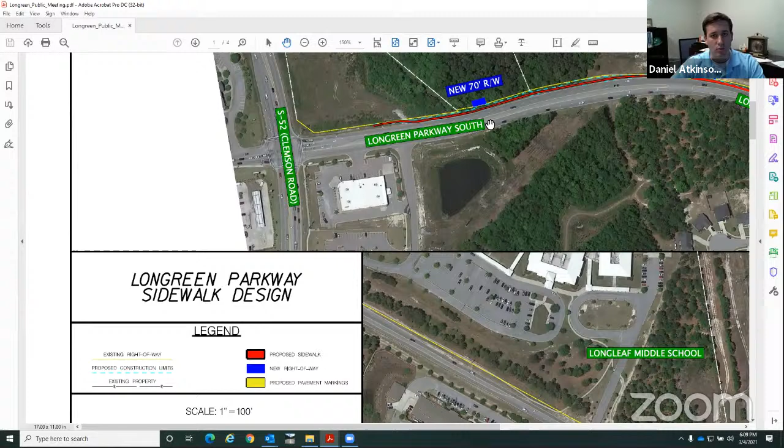The new right-of-way in certain areas would be for slopes that go outside existing right-of-way, riprap which we need to slow down the water to prevent erosion, extension of pipes, maybe silt fence - those are some instances where we'll need new right-of-way. The sidewalk is on the western side, starting here, and extends all the way through Landon Place Drive, where it connects to the existing sidewalk at Longleaf Middle School.

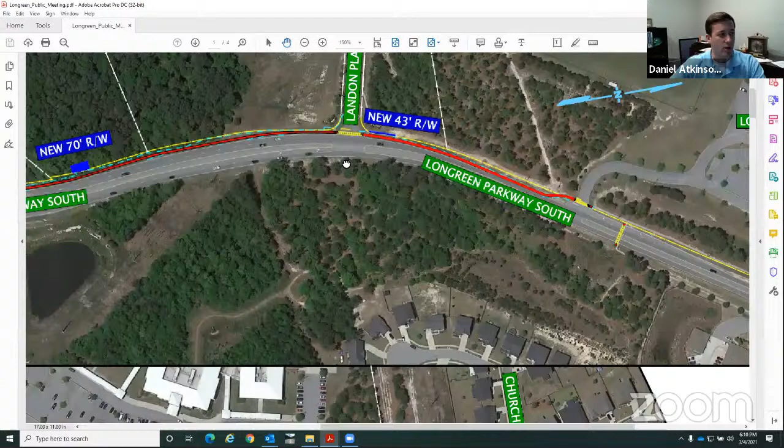One other point - since Stephen mentioned this was a request from the schools, we are going to propose putting back ladder style crosswalks. Ladder style are what you put where schools are located, and they're safer for pedestrians and school children. There'll be high visibility - you can see them very well at night as well. They kind of sparkle a little bit at night if you shine your lights on it the right way.

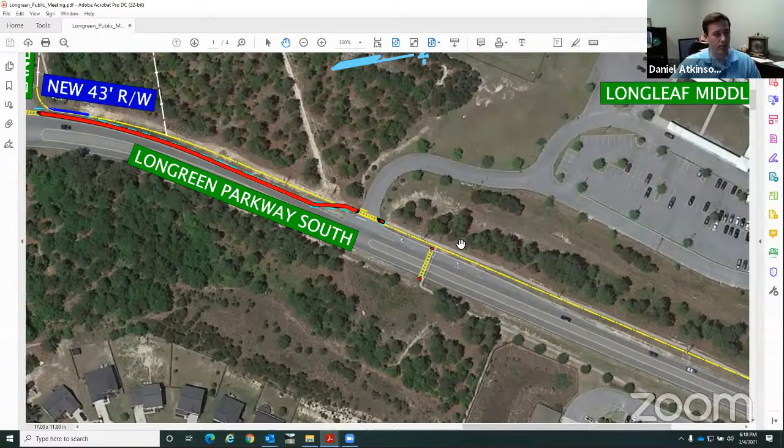We tie into the sidewalk located here at the middle school. We are also going to rebuild the existing curb ramps at this crossing, which doesn't have truncated domes or ADA curb ramps. So we're proposing to replace that as well, and put new pavement markings down there to make that stand out a little more.

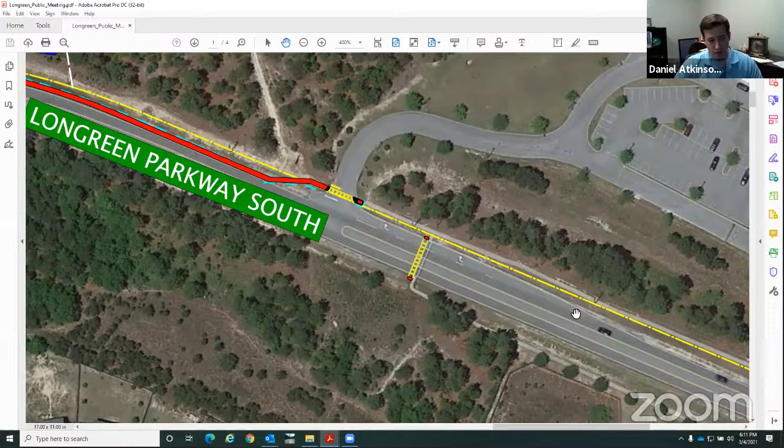Also, part of this project, we are adding a layer of asphalt to the right turn lane into the school only. In this area, we will not be resurfacing Longreen Parkway - we'll just be adding a lift of asphalt at this location. Anybody who uses that school right now knows there's a little drop off, so we're going to mill that a bit, make it smooth, and then add a lift of asphalt in that area.

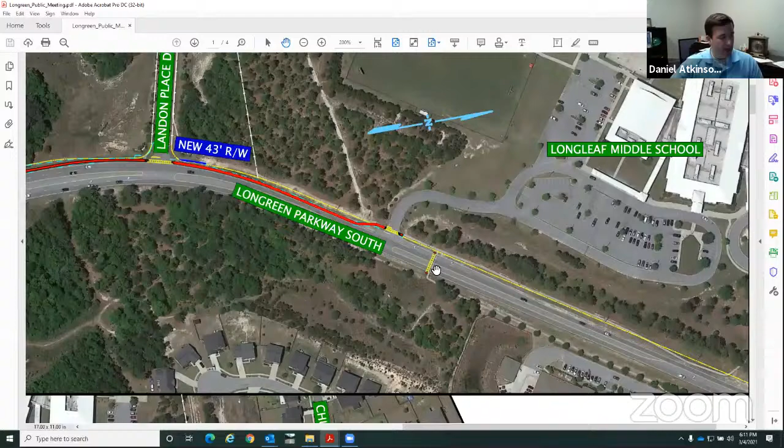So that's kind of the Longreen Parkway South in a nutshell. As I mentioned, it's about 1,600 linear feet. We'll talk about the northern segment.

The northern segment starts on the other side of the school entrance, and as part of that project, we're also going to rebuild the crosswalk in this area and add some curb ramps and some truncated domes. We will also be resurfacing this turn lane, just the right turn lane in. We will be putting the sidewalk on the eastern side of the project, since there is already existing on the western side. But we continue—

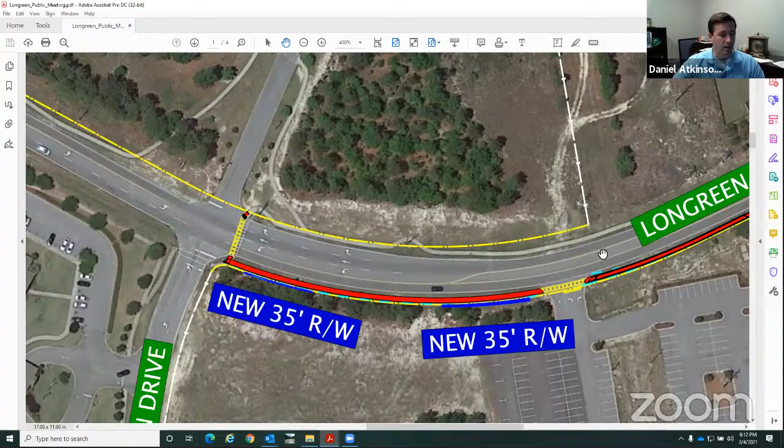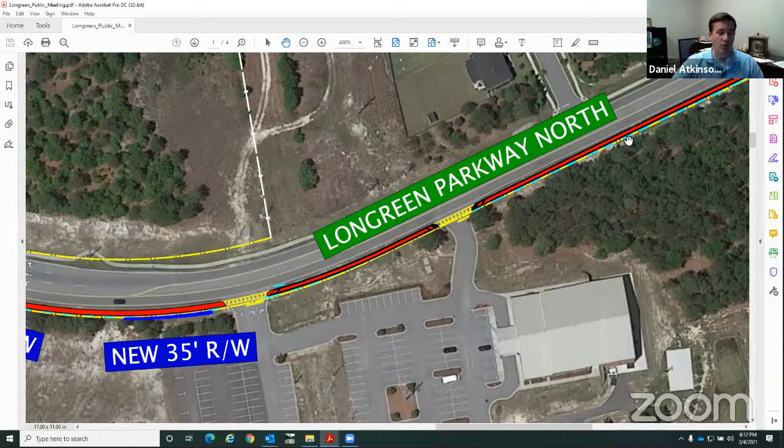The ladder style crosswalk throughout this corridor as well, since it connects to Sandlapper Elementary.

So we will be getting a new right-of-way from this church right here. We have new riprap, which we need to stabilize ditches for new pipes. So we will be acquiring some new right-of-way in this area as well.

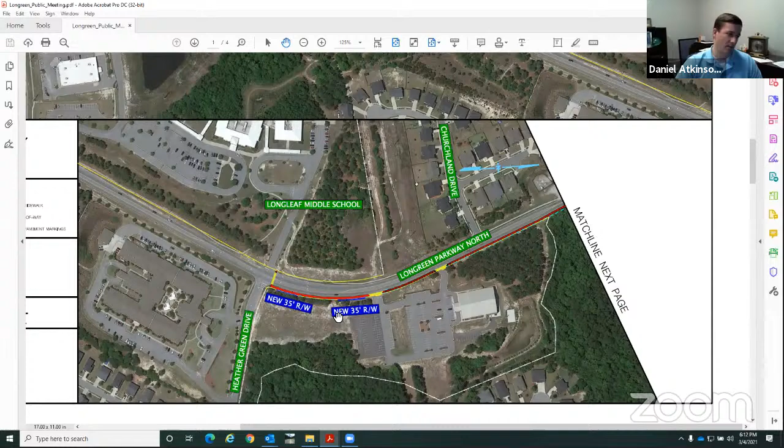I'll move to the next sheet. This is Roberts Branch, and we will be continuing the sidewalk down through that area. We will decrease the sidewalk in this area to 4 feet for about 100 feet.

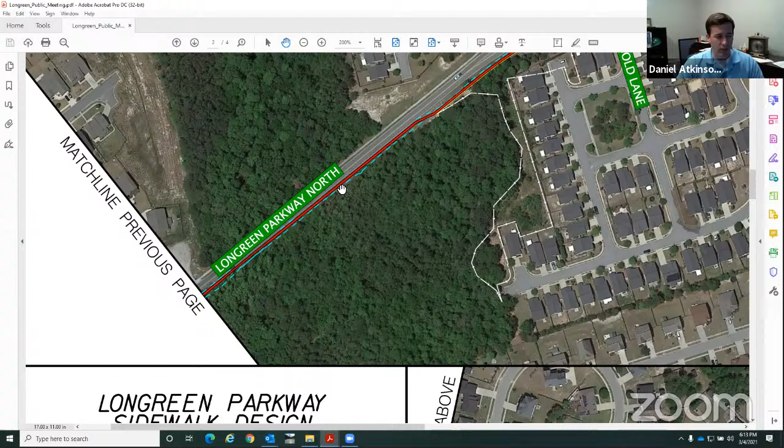This is due to environmental impacts, which would be associated with extending the pipe. So we decided that we did not want to impact the wetlands, impact the streams, impact the FEMA floodplain. So we shrunk the sidewalk to 4 feet in this area for 100 feet only to mitigate for those environmental issues.

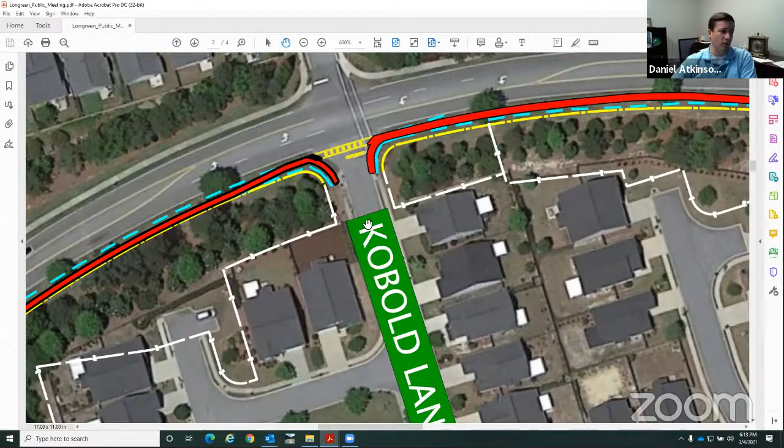Moving to the north, we cross Kobold Lane. We will tie into existing sidewalks on Kobold Lane. We will rebuild the curb ramps at all these locations as well.

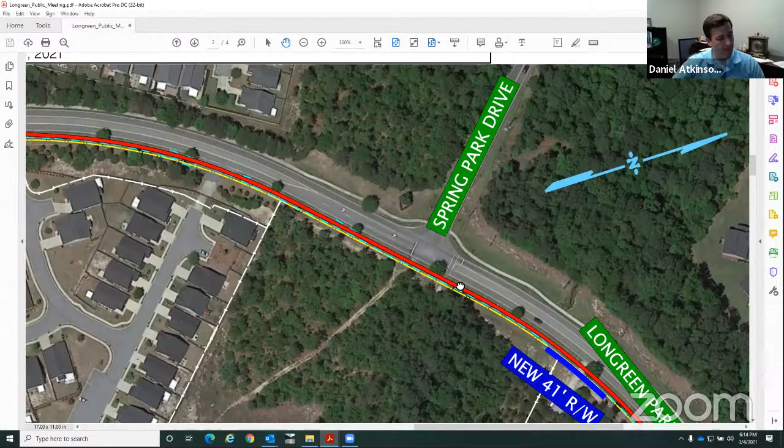And this is Spring Park Drive. We will have a curb ramp as well right in this location, which as part of the Spring Park Drive, since this is a three-way stop, we would propose to connect that sidewalk to this project.

Moving on down. New right-of-way in this area is due to a new ditch and some new riprap, which is required for sediment and erosion control.

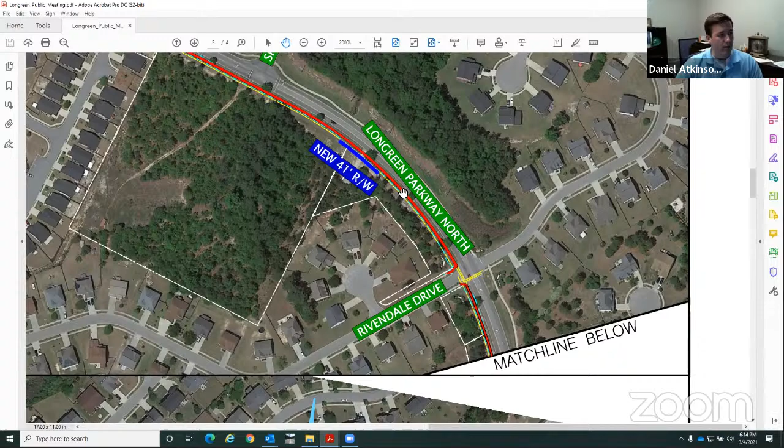At Rivendale, we're rebuilding the curb ramps, adding new crosswalks, new stop bars, and tying into the existing sidewalk in that area as well.

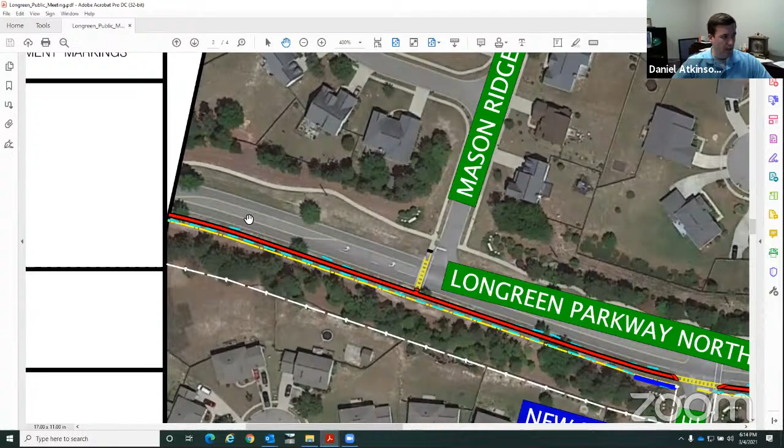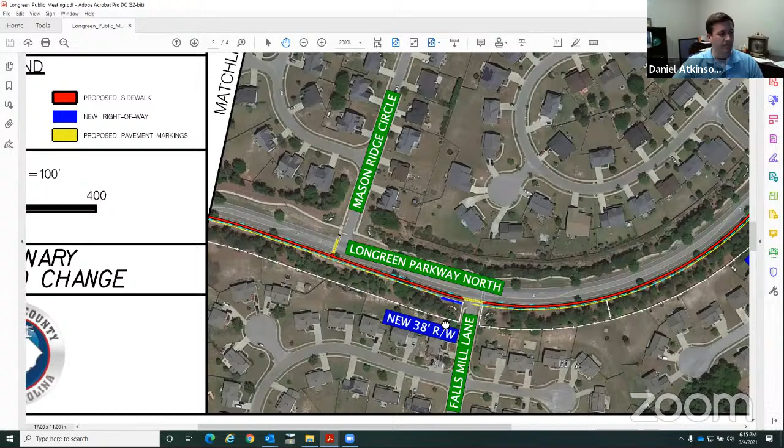And then we will go here, and continuing north, we'll restripe this existing crosswalk at Mason Ridge and Longreen. Some new right-of-way here as well. We are trying to avoid all—

development signs and irrigation. We may have some small impacts, and if there are some impacts, we will coordinate those with the property owners during construction to try to get them relocated or try to design something so we don't impact these areas.

At Falls Mill Lane, we add new curb ramps, new ladder style crosswalk, and a new stop bar.

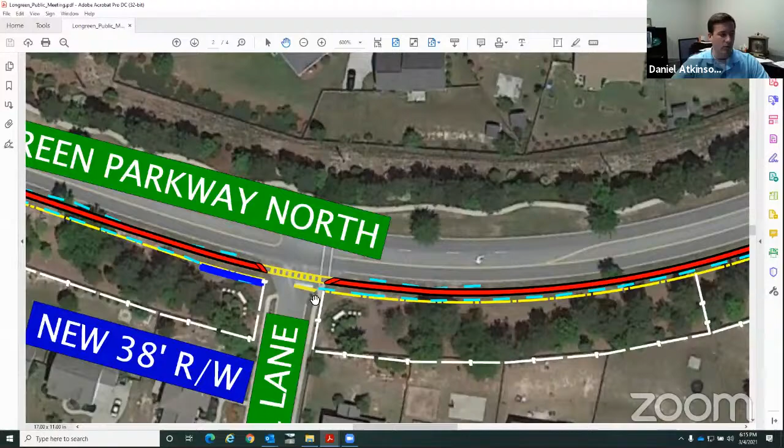We continue north. For this area, we have to acquire new right-of-way because we have to make sure the water flows back towards the south, and we need to steepen up our ditches and also add some erosion control measures like silt fence and turf reinforcement matting to slow the velocities and prevent erosion.

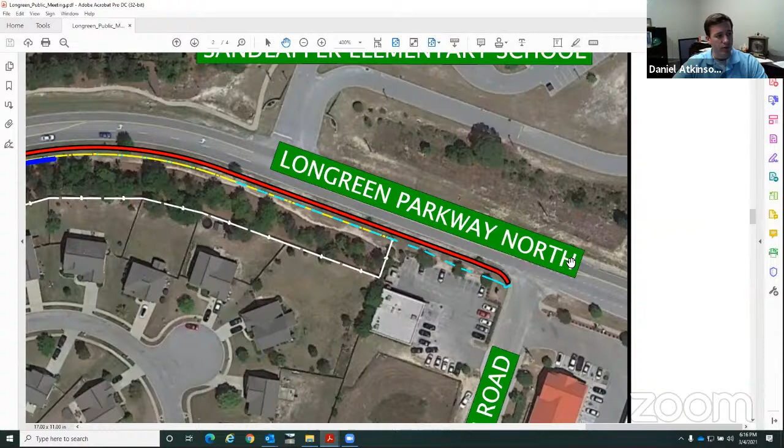We extend north all the way to Longtown Road where our project ends. There is an existing sidewalk we will tie into in this area. And we will also be resurfacing this turn lane into Sandlapper, which you can't see, but it's the same situation which occurred at Longleaf Middle, where there's a drop off. So we'll be adding a lift to surface course as well to that area.

So that's kind of the overview, a more detailed, down in the weeds, plan view of the corridor. We'll show you some sample illustrations of the typical section, which is what it would look like.

So this is Longreen Parkway to the south, from Clemson Road to Longleaf Middle. You have your 3-lane roadway, and you'd have your new sidewalk on the western side of the project.

Moving to the north, Longreen Parkway to the north. This is pretty much the exact same traffic configuration, 3 lanes to the north, except we have the new sidewalk on the eastern side of the corridor.

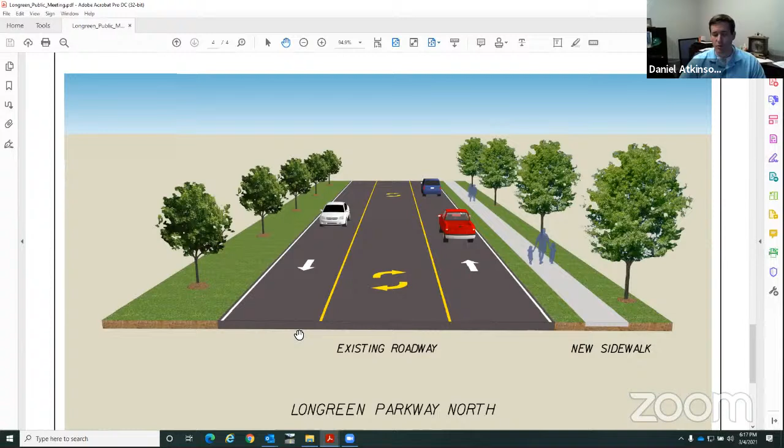Another thing that Stephen mentioned is the school crossing guards. As part of this project, we are adding special signs and flashing lights for the school zones, which the county will operate and maintain in the future. The flashing lights are called TAPCO flashing yellow bulbs, and we'll be installing 4 of those throughout the project corridor, taken care of during construction.

I don't think there's anything else. One other tidbit: this is not an SCDOT maintained road, it's a county maintained road, so we will not have to acquire SCDOT encroachment permits.

And I think that's all I had, Stephen and Mike. Is there anything else you wanted me to address? I don't know about Stephen, but I do have questions here. I can read some of the questions that have come in, and I think you may have covered some of them in the presentation, but I will read them in full.

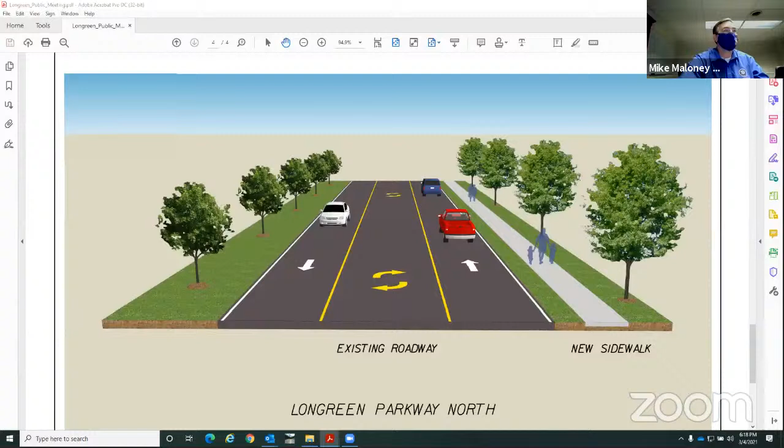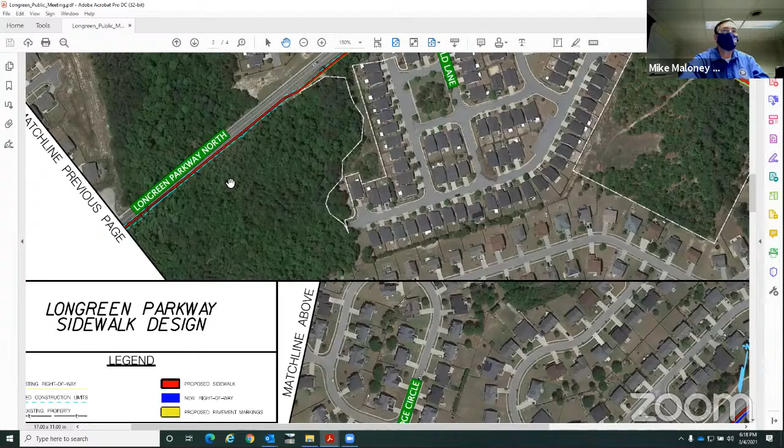ADA guidelines recommend a 5-foot wide sidewalk, and that's what SCDOT does as much as possible on new projects. Although the Parkway is county owned, why not follow current ADA guidelines instead of 4-foot wide? I believe you pointed out that we are putting in 5-foot, but there is a stretch with environmental concerns. Yes, there are actually 2 stretches. There's one at Roberts Branch, where we figured it was better environmentally to reduce the sidewalk down to 4 feet. That would prevent us from lengthening. There's about 8 84-inch or 60-inch crossline pipes there, so reducing the sidewalk prevents lengthening those pipes, which would have negative impacts on wetlands and streams. So we shrunk the sidewalk down to 4 feet in this area to mitigate for those environmental impacts.

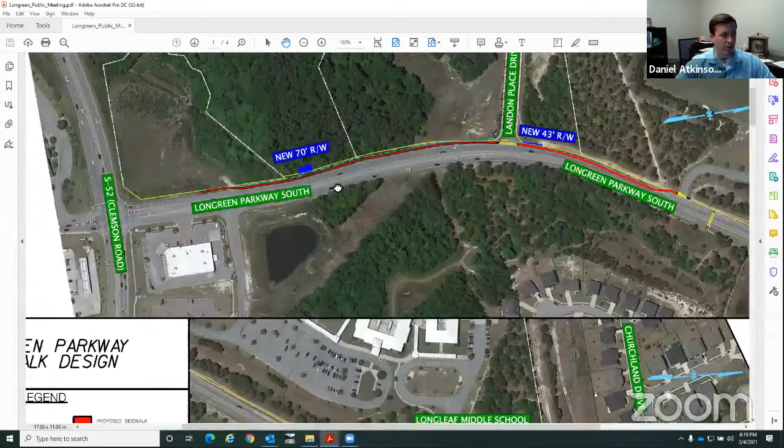There's also an area I forgot to mention at the beginning of the project. We reduced the sidewalk width down to 4 feet there as well, to prevent lengthening pipes - there's about 4 crossline pipes at this location. We do have to get new right-of-way, and there were wetlands here, so we had to get a wetland permit for the riprap, not for extension of the pipes. We are still following ADA guidelines, since ADA and SCDOT allow you to reduce the sidewalk width to 4 feet for a maximum length of 200 feet. At the 200-foot length you have to have a bump out, but ours is a 100-foot segment, so we do not have to do that.

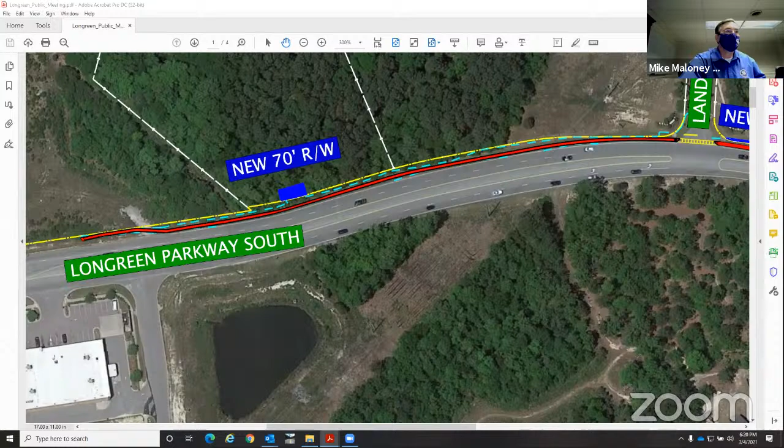Okay, I'm going to continue with the participants' questions. Where specifically on the plans will the flashing school zone signs be located? And also, is the plan to retrofit the current curbs to meet the latest standard, or will all of the curb ramps be ripped up and replaced with new ones?

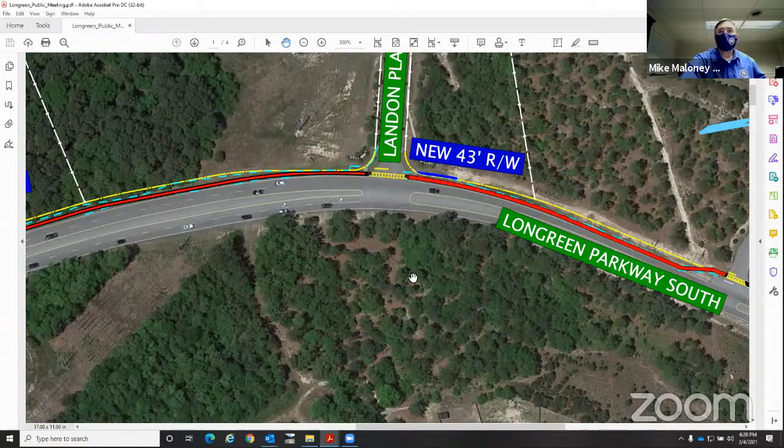So, first with the school zone light locations: the first TAPCO speed sign will go right around this area in Landon Place, on the northbound side - that'll be number 1. The next one will go in this area on the southbound side of Longreen Parkway, for the traveling public on the south. And then we have two more, trying to find the exact locations.

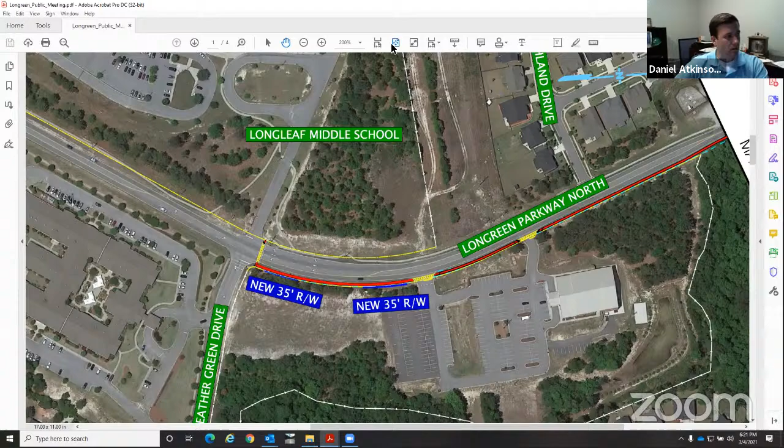The next one will go in this area, right after Vineyards Crossing on the northbound side. And the last one will go off of our sheet in this location, for the southbound side of Longreen Parkway.

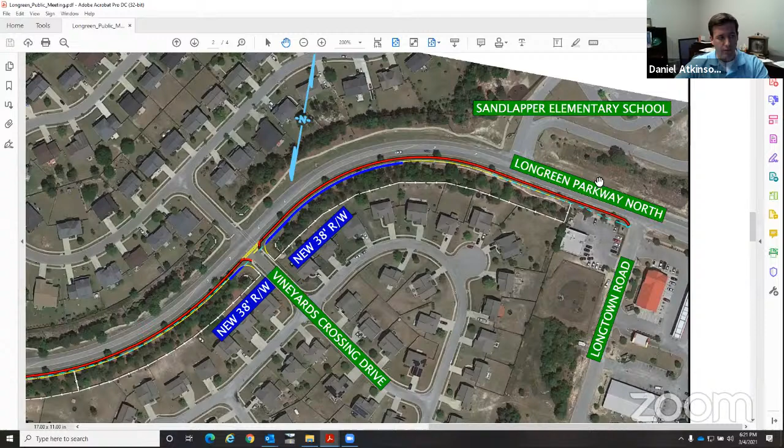As for the curb ramps and standards, where we are, we will be putting down new ADA compliant curb ramps, and where we have to rip out existing curb, we will be ripping it out. For the most part, everything should be built to current ADA standard, and we'll be able to retrofit where available. But we may have to rip some sidewalk out to replace it and put new curb ramps in, with truncated domes down.

Okay, this question - maybe engineering can participate here - with Mungo building new townhomes across from the Longreen and Spring Park intersection, are you requiring them to add a stop sign to make the intersection a four-way stop? That would be, I can check on that. Our new development staff handles all the new construction for subdivisions. I don't know the answer to that right now, but I can definitely check on it and provide an answer later.

Okay. We heard that at Spring Road, with the new development of townhomes, there would be a roundabout. I don't know of any plans for a roundabout there at this time, so I'm not sure about that question.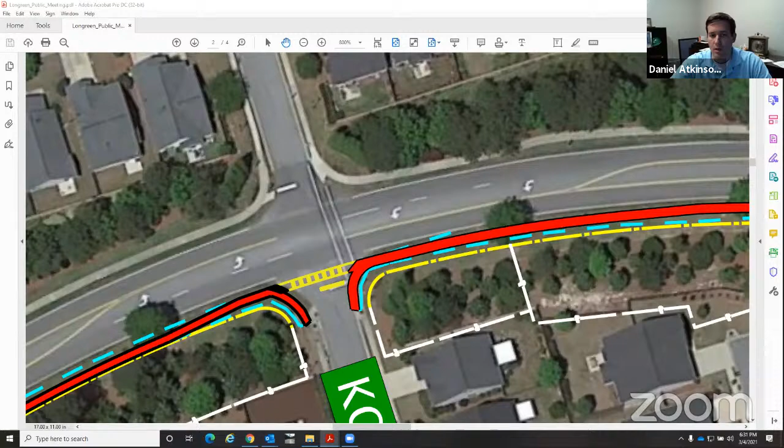Miss Etheridge asks, since the road is being widened, how much of the homeowner's property is being taken? We are not widening the roadway. We are just placing new sidewalk on the grass area to the outside. The existing pavement will remain in place and will not be widened.

The sidewalk is going in the public right of way, correct? Correct. New sidewalk will be inside existing right of way throughout the whole corridor. Going back to your plan view map, there are some blue areas, little blocks of blue, representing where property acquisition is needed for sloping and such. You mentioned this in the presentation, and that's the limit of it, shown in blue in those areas. Yes, sir. Okay, thank you.

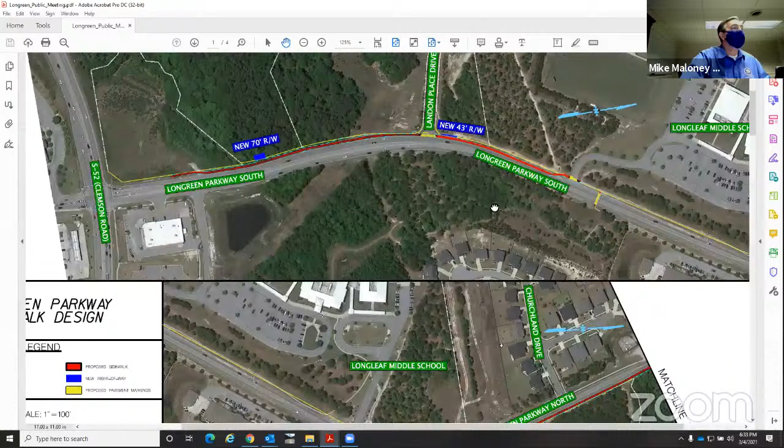Mr. Everett McElrath asks, is there prioritization for where the construction will begin, which end? Could connecting Landon Place Drive with the sidewalk that ends at Longleaf Middle School be a priority? He notes that students in Landon Place are currently walking to and from school with no sidewalk.

Yes, sir, I believe we could put that in once we have a contractor on board. We could talk about the phasing of the project, but I don't see where that would be a problem, unless Daniel, you see an issue with that? I do not.

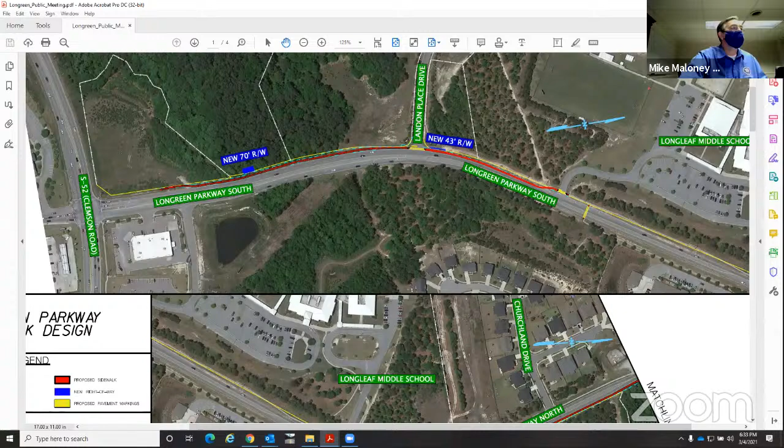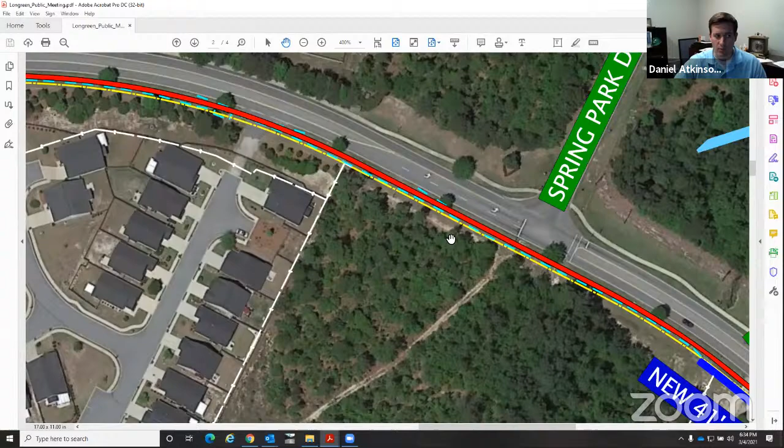From Clifton Sellers: since there's a lot of pedestrian traffic on this road, wouldn't it be a good idea to upgrade all crosswalks to the ladder style crosswalk? For the most part, we are upgrading all crosswalks except at Spring Park, which will probably be handled during the upcoming Spring Park sidewalk project.

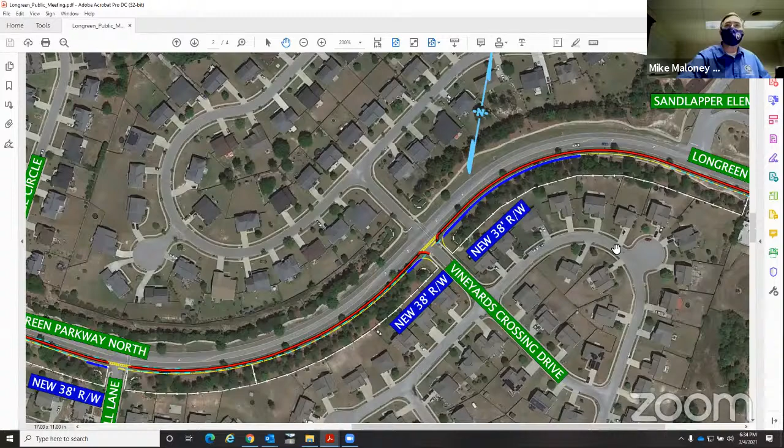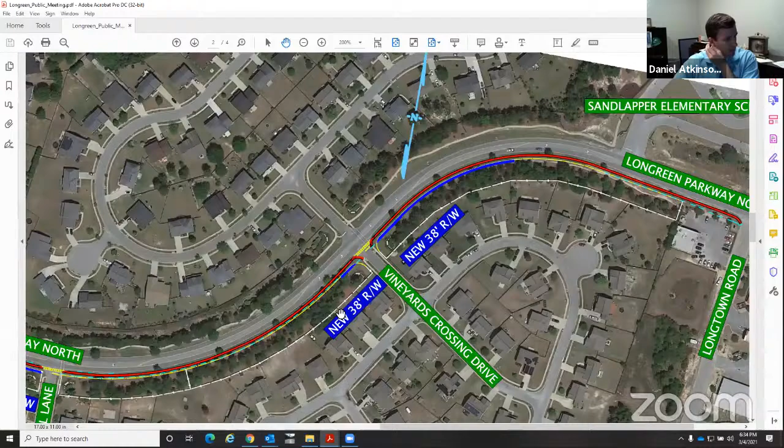But for the most part, where we are designing the new sidewalk, we are replacing and upgrading the existing crosswalks. There was one that would be added that was mentioned - I'm going to add one at Landon Place. Wait, no, Ivy Square and Falls Mill Lane. I'm going to add three of them: right here at Kobold, right here at Falls Mill, and then right here at Vineyards Crossing.

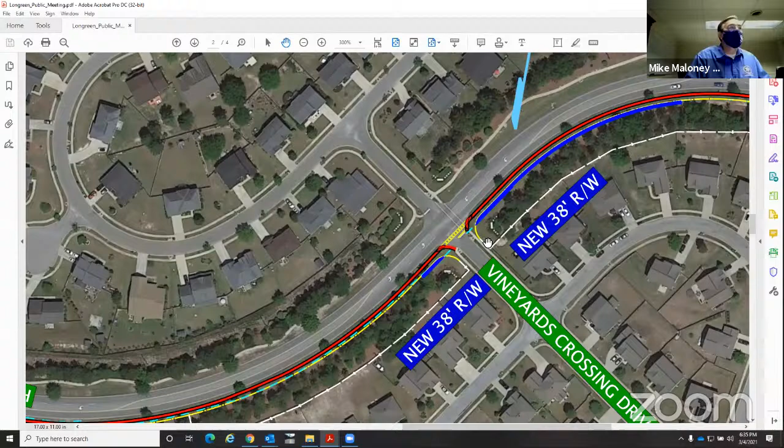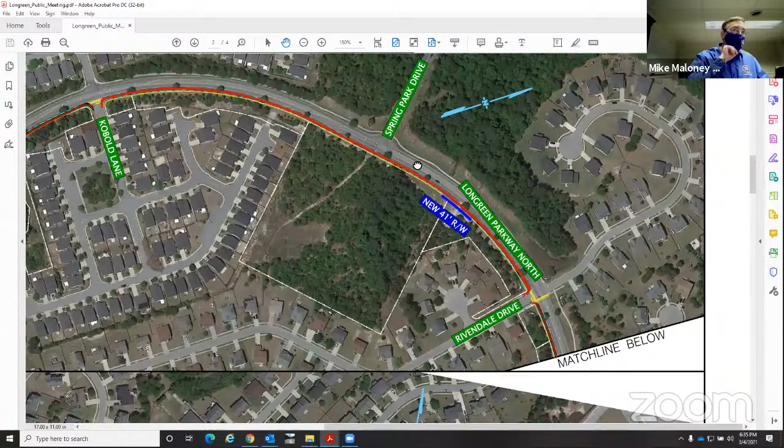If you want to go back to the drawing that showed the intersection for the upcoming project - Spring Park Drive, that's a project going into design, just starting soon once it's contracted through the administration of the county, and that is a sidewalk that goes up. Is it one side, Stephen, or? Just one side, yes, sir.

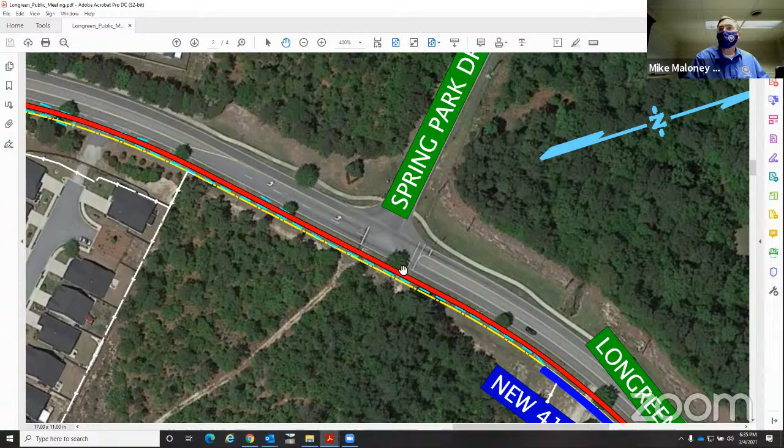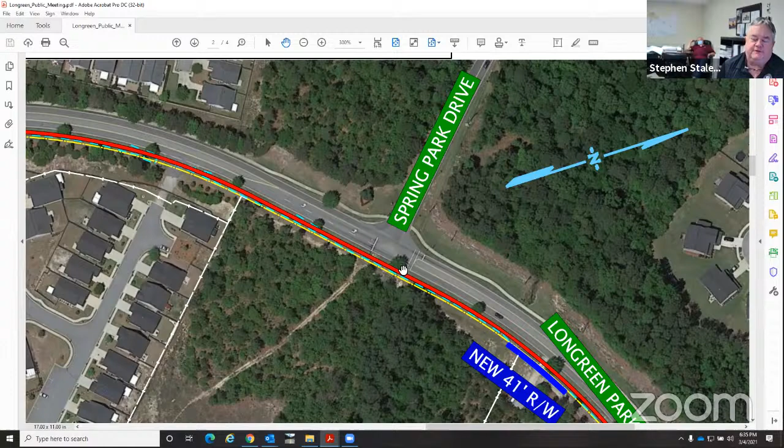As a matter of fact, that was just approved by county council to start the engineering on Tuesday night. Very good. Any other questions out there?

Well, I definitely thank everyone for their participation. You've given some new insights into some areas, and notes have been taken that will be adjusted. I think what we'd like to do is provide these PDFs on the website with those adjustments so people can see what changes were made. Definitely appreciate that.

New question in: is it possible to get a copy of the slides? Yes, we'll post this on the county website. We are also live streaming to YouTube for your reference to go back to this, so it will be a recording on the county's YouTube channel.

Another question came in: as a homeowner in Spring Park, how far will the sidewalk go along Spring Park Drive? All the way to Hobart. From what I remember, I think it goes all the way to Hobart Road. It was a fairly long reach, yes.

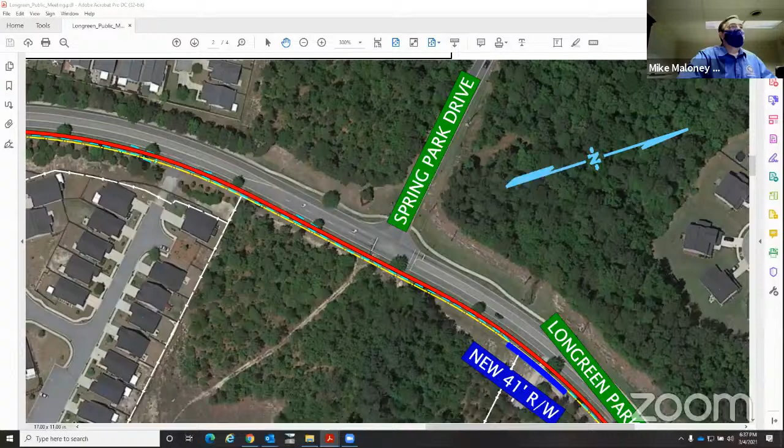And then Jason Enoch asks, any improvements to the sidewalk distance being so close to the road between Landon Station and Ivy Square?

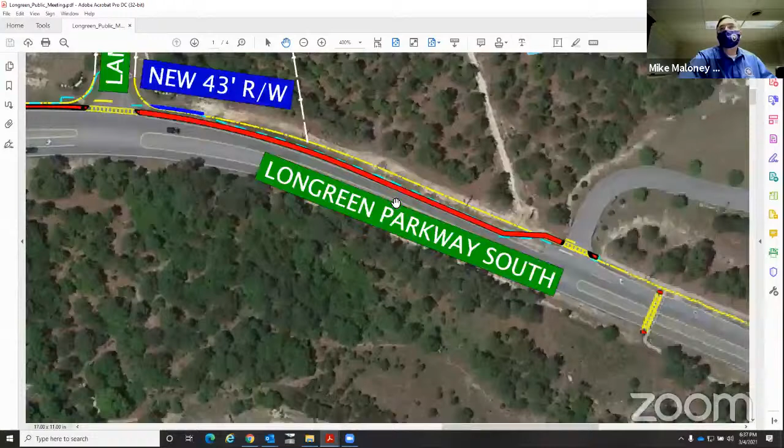Mute again, sorry. I'm not really sure of the question.

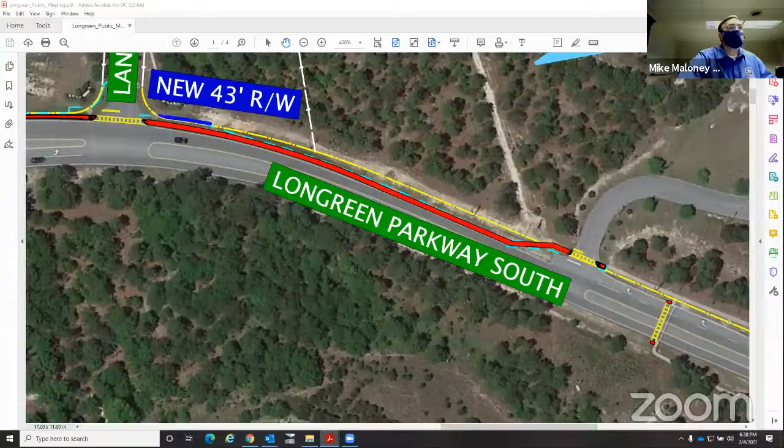We are going to be adding new sidewalk, and it will be 3 feet off of the existing roadway in this area. Let me pull up the plans to verify, but it's pretty consistent until you get down to the entrance, and then we jog out to tie into the existing sidewalk on the west side. All the way we have crosswalks.

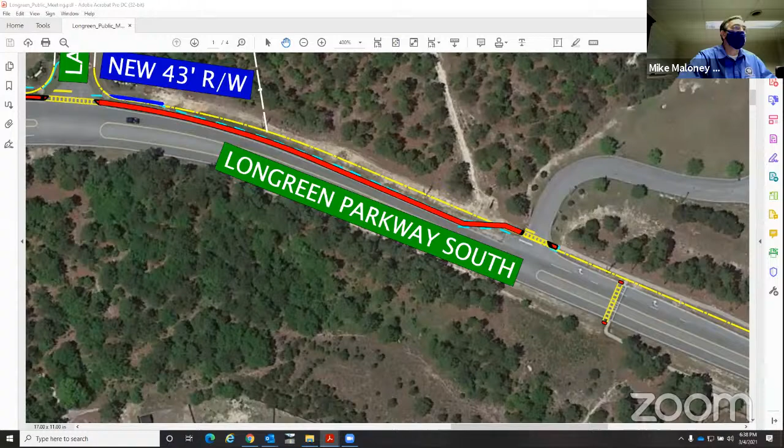Brenda Moss asked a question. Your plan does not show the new construction occurring on the west side of Longreen behind Ivy Square, across from Spring Park Drive. Are you aware of the project? Your design shows trees that have been removed.

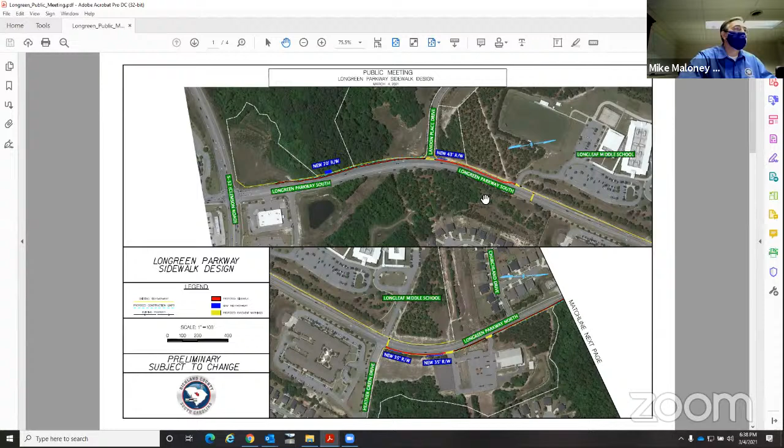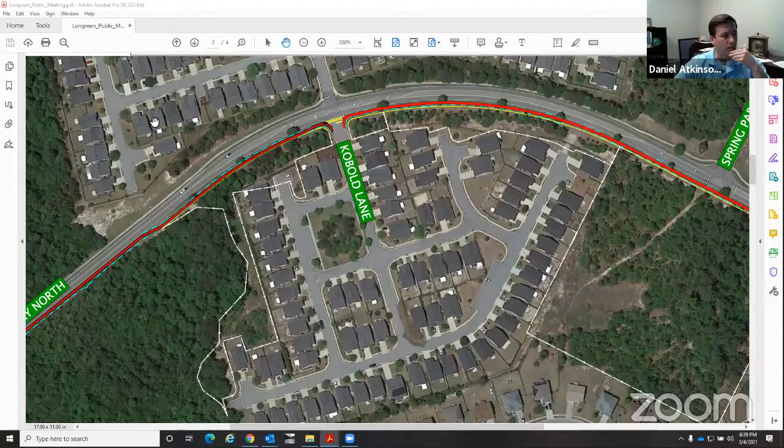West side. I'm sorry, I'm trying to figure out where I am, and then I'll answer. Okay, let's see, the construction is occurring on the west side of Longreen behind Ivy Square. Unfortunately, we don't have updated aerial photography right now, this was just what was available. So there's a good possibility that the trees, as you mentioned, are not correct. However, we are staying inside of the existing county right of way, so it should not have any impact on new construction on that side.

Yeah, and these are presentation level plans. The project was surveyed and designed, it's on engineered plans for construction. And we're also on the east side of Longreen Parkway in that area, so we should be all right.

Question came in: which side of the road on Spring Park Drive, left or right? I believe it's going to be, as you turn onto Spring Park, on the left side. But we haven't designed it yet, so that may change. I believe the intent is for it to be on the left-hand side, or west.

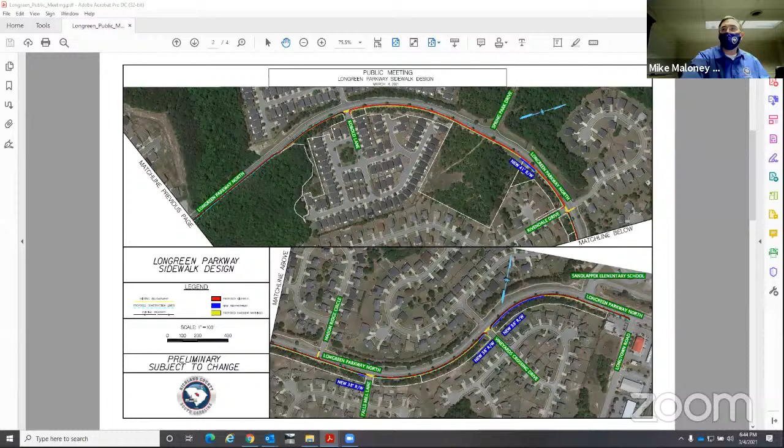It appeared where you have paving for turn lanes, wherever there's an dedicated left turn lane in the middle, i.e. the 3-lane areas, the contractor could come up with a plan to utilize that temporarily to shift vehicles away from certain intersections or even center block areas. But there was a couple you pointed out that may not have that center turn lane, or it's being used as a dedicated turn lane, so we may have some areas where construction timing needs to be considered.

Okay, question from Gene Craig. Has a survey been done of sprinkler systems so they're not damaged during the process?

We did do a survey in this area and picked up what we could find on the ground. We did pick up some sprinklers. I did not note many that were being impacted as part of the project, but I know there are some in this area because I walked it.

And you mentioned in the presentation, maybe it was a specific area where you would coordinate with HOAs on that particular issue, I believe. Right. If during construction something like that arises where it looks like there will be an impact, we'll make sure that the contractor is aware of that.